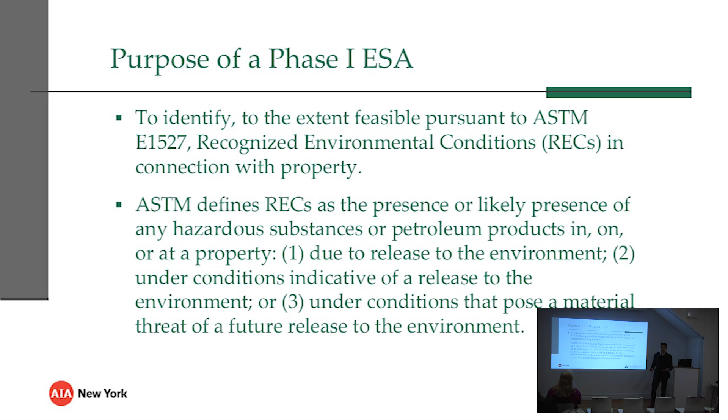Basically the purpose of a phase 1 is to find a recognized environmental condition, which the definition is the second bullet, but it's basically: was there a discharge of hazardous substance in the environment, or could there be a potential discharge to the environment? It's a desktop evaluation and a site reconnaissance. There's no borings, no drilling, no sampling when we do an ESA.

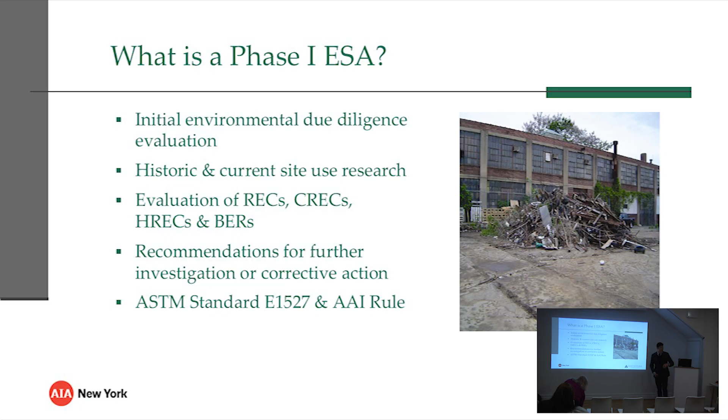We evaluate the site history and current site conditions to identify recognized environmental conditions, controlled recognized environmental conditions, historical recognized environmental conditions, and business environmental risks. And then we provide recommendations for a phase 2 or any other corrective action or remediation if necessary.

Would that include plumes nearby? Yes, that's a vapor encroachment screening. If there's a site that's adjacent or nearby to the property and there's potential for groundwater contamination to migrate onto the property, which could result in vapor intrusion into the building, it would include that. A tier 1 vapor encroachment screen is typically included in a phase 1 ESA.

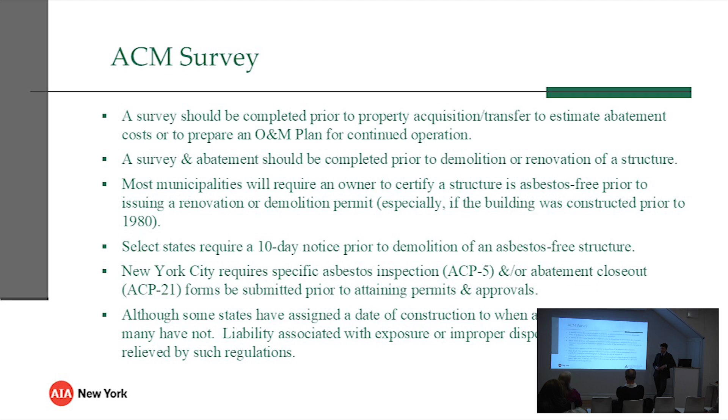Okay, so abatement, removing the asbestos from the building. The EPA and usually the state requires a 10-day notice before you start abatement. Depending on the size of the area that contains the asbestos materials, you need to provide some kind of containment, whether it's a small room like this, we can tarp off the doors and call that good, or if we're abating a whole building, the whole building is tented.

An alternative to abatement is encapsulation, which is encapsulating like a floor that has 9x9 floor tiles. Usually that ends up being more expensive in the long run because it almost costs more money to do the encapsulation the right way. And then if you're gonna redevelop down the road, you're probably gonna wanna remove that ACM anyway.

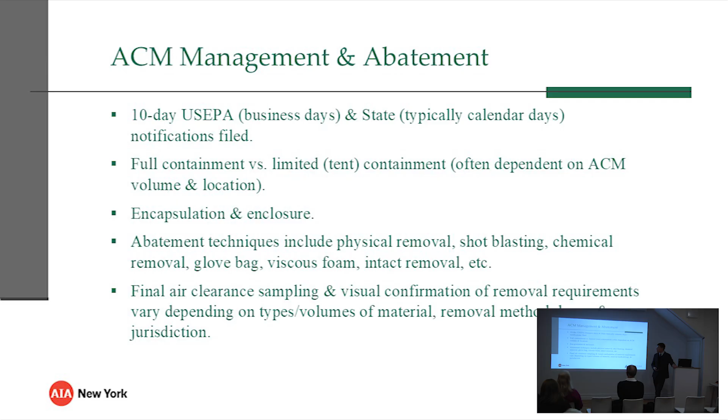Yeah, go ahead. What about roofing, tenting a building or not? Yeah, that's a good question. I'm not sure. There's different kinds of abatement techniques to minimize any particulates. And anytime there's a controlled demolition or abatement, there's air monitoring requirements to ensure that there's no fugitive emissions off the piece of property. So there's ways of getting around that for roofing or hard to enclose areas. Okay, and then a requirement post abatement is to get air clearance samples, which just means that the facility is free of any asbestos fibers in the air.

Phase 2. Okay, so this is what I do. This is where we take the findings of phase 1 and we actually go and collect samples. You've got a recognized environmental condition. There's potential contamination, and we go and sample soil or groundwater or soil vapor to see if those RECs are actually contaminated. It's not intended to be a comprehensive delineation or investigation. It's just, do you have a problem? Yes or no. Trying to judge the magnitude from a phase 2 is sometimes difficult, and usually they can be iterative. You do a phase 1 and then a phase 2. We identify contamination. We say, hey, we should look into this one REC a little bit more.

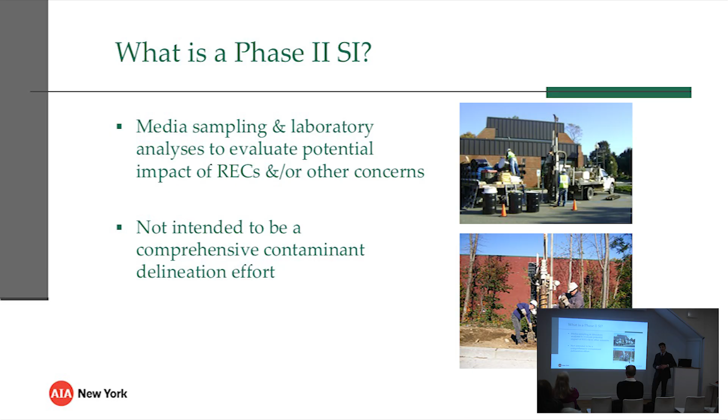There's high levels of contamination, or maybe it's a limited area or something like that, to sort of quantify what the client would be into for remediation. Are there different ways of remediation? One would be like removal, another one would be to let it air out, make a pile, and let it...

Yeah. Well, there are 1,000, depending on what kind of contamination you have. There are 1,000 different technologies, from removing contaminated soil and disposing of it off-site to chemical injections into groundwater to remediate contaminated groundwater. Soil vapor extraction. I think I have a slide on remediation. And a lot of times it's a cap and a deed notice or something. Right. Along those lines. That's a good point.

Yeah, if you have a site where it's going to be a commercial site and you don't meet the commercial soil cleanup objectives in New York, you can put an impermeable cap on and implement a deed restriction on the property. Right, which could be your building, the paving. Right. Whatever. Landscaping. If there's 2 feet of clean fill.

All right, so yeah, I covered a lot of this. If we identify any RECs that may need investigation, we recommend conducting a phase 2, and obviously the scope of the phase 2 is dependent on the findings of the phase 1.

I find that the phase 2 is the most important because it can actually give us an idea how to quantify what kind of cost a developer or a client is potentially going to incur to deal with their environmental issues when they go to redevelop, or if it's too risky, they may back out of the deal. So I'll go through a couple different remediation technologies here.

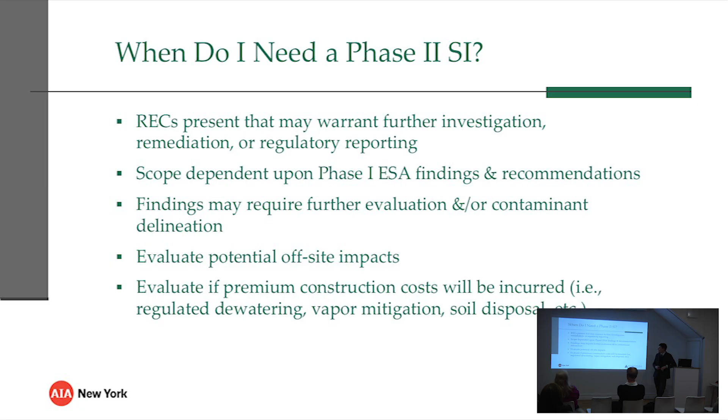Say what? Sorry? Send it to Jersey. Send it to Jersey. We've been sending it to PA quite a bit lately, actually.

Groundwater remediation. There's many different technologies to remediate contaminated groundwater that are beyond the scope of this conversation. And as we talked about before, just capping the site and implementing a deed notice. And then for groundwater, another thing is natural attenuation. Sometimes contamination just kind of goes away on its own.

And then what I do, I specialize actually in vapor mitigation, which I'm sure you guys have seen quite a bit. It's like a radon system beneath the building. It's perforated pipe beneath the slab of the first floor, and PVC ventilation pipes going to the roof.

So yeah, that's kind of why I end up talking to architects most, because I'm an engineer, so if it works, I don't care how it looks, but you guys care how it looks, and if there's 12 4-inch diameter pipes going up the side of the building, you kind of want to have a conversation with me. So how do you take the pipe? Well, how do we bring it to the roof?

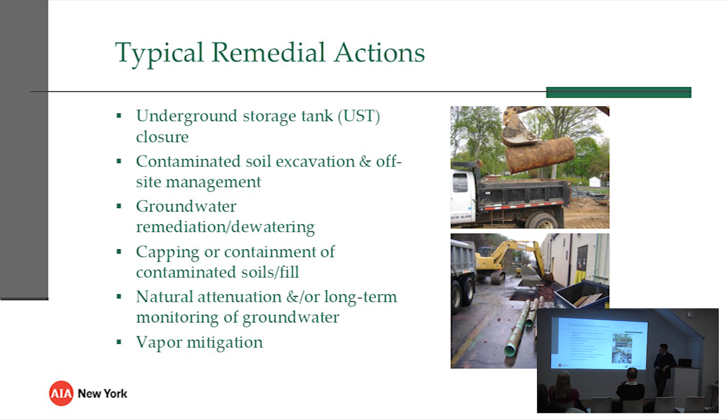I got more slides here. So a PCA is basically documenting. So the phase 1 ESA is the ground, and ACM is asbestos. The PCA is just what does the property look like, the physical condition.

So we look at documentation on critical components of a building, like the HVAC system, the windows, the roof, and understand how old those components are. We do an inspection of the property to look at the condition of all those components, and then we'll prepare a cost estimate and an approximate lifespan of those components, and then compile that into a report.

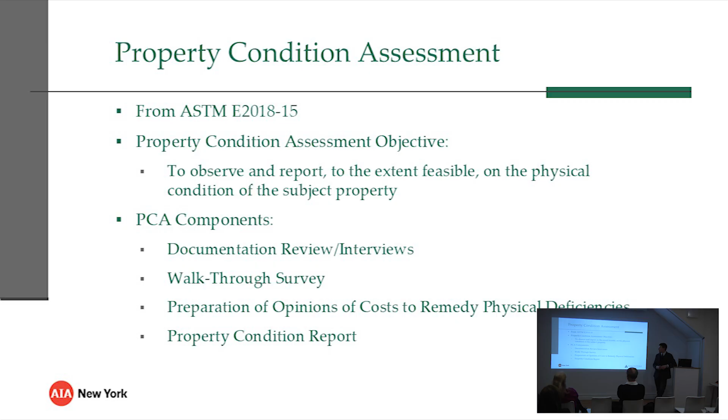So you want condominium associations that require that now? So yeah, I am going to get to that. Thanks. When a homeowners or a condo association needs to generate their reserve estimate, they need to know how much am I going to need, are we going to need a new HVAC system in 10 years, and how much is that going to cost, and they use that to develop their reserve.

In some states, I don't know if New York does. They will, not yet. You don't think so? Yeah, okay. But Florida actually requires ongoing PCAs since that building collapsed a few years ago, and they actually review the homeowners association reserves and the PCAs. Right, and we identify any deficiencies requiring repair, and come up with a replacement schedule for any componentry.

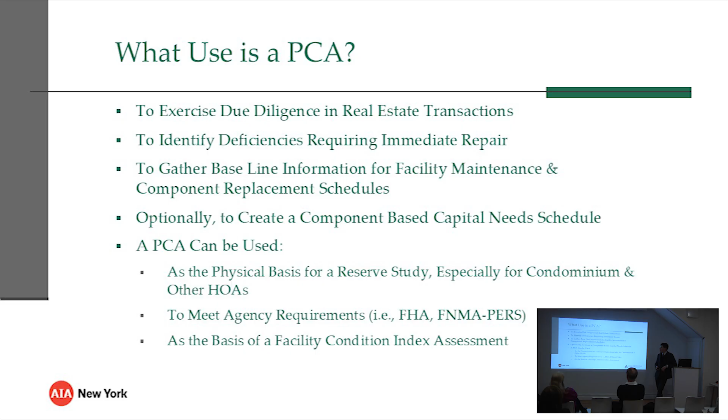All right. We made it. Now we're on the geotech. Yeah, that was good. That was quick.

All right. So one thing I'll add to that before we get into more of the geotechnical, I'll bring my water with me, is that the purpose of that phase 1 ESA, the reason the banks want it, is something called all appropriate inquiry. So if you don't do a phase 1 ESA and there's contamination on the property that you buy, it's now your contamination and your problem. If you do the phase 1 ESA, then you could go back to the responsible parties. So that's an important aspect of that.

Oh, that's interesting too. We're changing up here and not changing here. Yeah, you alluded to that.

Okay, so what Steve said in the beginning of this is a little bit of our environmental geotechnical due diligence presentation, and now we'll get into the ground a little bit more. I guess we're moving top down instead of bottom up, and these are some of the approaches that we typically use when we have a client that's looking to purchase a property, and some things they need to think about so that they don't get in over their head after they already have the property.

Because, look, you can specify stone on the wall that you acquire from halfway around the world. You can get whatever kind of windows you want, but the site is the site, and a lot of times in real estate it's location, location, location, and all the good sites are gone. So most of the developments now, before they get started, before you get a building, before you start picking out what you pick out, we usually have to go through these hurdles. So it's an important part of the overall process, right?

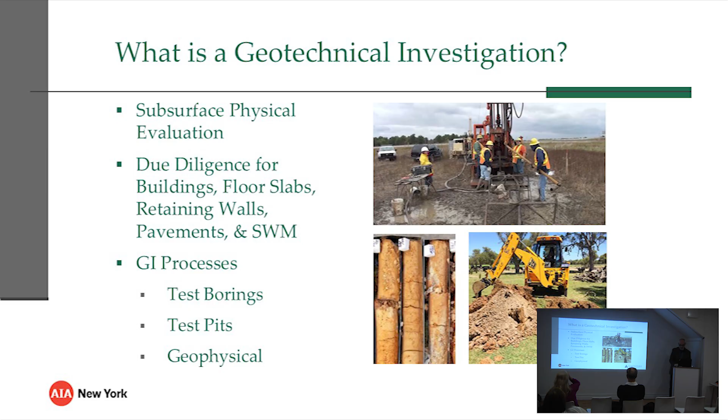Most of the time you're doing something with either test borings with a drill rig, test pits with a big excavator, or sometimes geophysical, where you get into carbonate rock areas, or areas with former mines. If anybody's heard what's going on with Route 80 East in Wharton, New Jersey right now, Route 80 East is closed down. They had a sinkhole open up, and then another one open up 75 feet away, and it's from an old mine. There were a lot of iron mines in that part of Jersey. So that was a major highway that was shut down because of it.

So when do you need to do a geotech investigation? If you're going to develop a site, I'm a little biased, but I think you need to do them. If you work with retail clients or commercial clients, they actually have a program in place where they have specifications they want to see met. Or there's a lot of local land development ordinances across the country. Certainly in New York City, it's very well defined. It's probably more defined here than in most other places.

So if the building code is going to call out what you need, regional geologic considerations. If you're out in College Point, I don't know if it's regional, but a lot of sites we've done along 20th Avenue out there, it's all 27 feet of garbage fill over another 10 feet of organics over weight-of-hammer material, very soft material for 80 to 100 feet. Has anybody ever walked around and seen some of these parking lots out there where you've got manholes sticking out of the ground?

There's what used to be a Waldbaum's. I don't know what it is now. But the building was on piles, so the building was going nowhere. But the parking lot wasn't, because you never pile support a parking lot. It's way too expensive. It would be crazy. But since the building didn't move, the parking lot sank. They were just throwing asphalt between the sidewalk, which was also pile supported, and the rest of the parking lot.

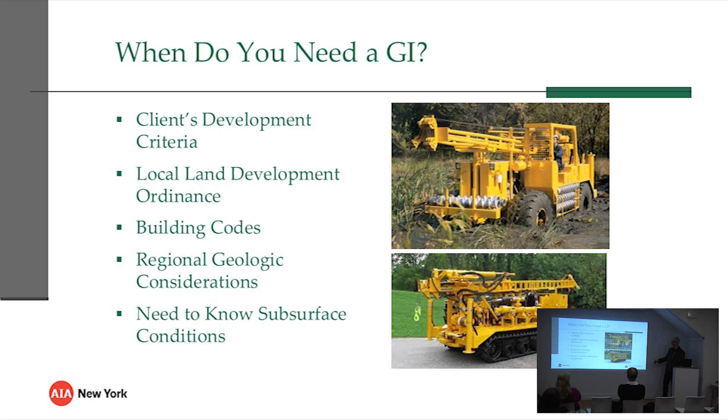And the last bullet is whenever you really need to know what's going on, which is when I say you should almost always do it. But why are we doing it? Why are clients doing it? Really what we're trying to do is manage that risk. Because every site has specific conditions to it, and not just the site itself, but it also depends on what your construction is and what you are building. Are you going 2-3 stories below grade? So now we're worried a little bit more about rock. We're worried a little bit more about groundwater.

Was this previously a 3-story residential? Now you want to build a high-rise. Obviously, it's a different condition. The borings need to be deeper. You need to understand deeper subsurface conditions. So every raw land site and every previously developed site, they all have site-specific conditions and project requirements that lead you down this path. A lot of times from a development standpoint, you're looking at it just as, what are my costs going to be to develop this property? That's really what you're trying to answer.

But when you think of it from a design standpoint, some of the things I touched on, there's cut and fill, there's bearing capacity or site layout. Sometimes it helps you from a site layout standpoint where I know I have issues on this side of the site, so I'm going to try and throw my basement on the other side. Or I'm going to try and throw my big cuts and change my grading based on where my issues are. Dewatering is the big one, right? Also, one has a habit of assuming that all the ground is the same throughout the whole site. So you take 3 borings and suddenly you think you have it all figured out, but you don't know anything.

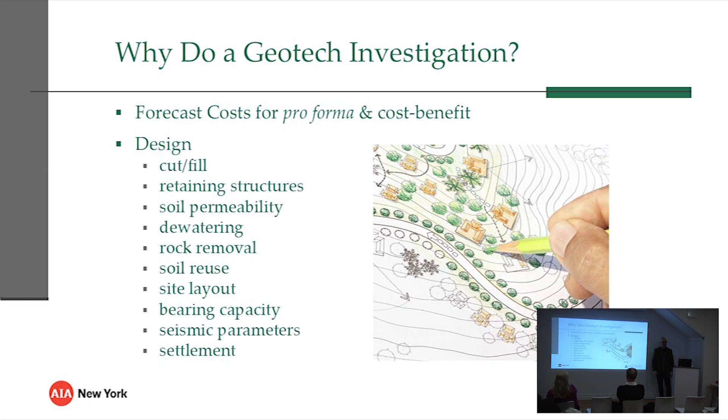I see a green lot in Brooklyn just full of grass with development all around, and I know we're going to pull the craziest stuff out of the ground once we start getting in there. That's one that was there for a reason; it hasn't been developed yet.

So what scope is needed? This is more of a strategy approach to what you need. A lot of times you have to look at what you're trying to achieve as the end result. From a due diligence standpoint, it's always good to do things in stages. For instance, you have a client that wants to buy a property. They want to be the first ones there.

They want to understand what their issues are, but they don't know if they're going to get the zoning that they want. So you may not go all in and do all the borings you would normally do. You may do a couple here and there and answer the big questions. Yes, you're going to need deep foundations, or no, you're not. You might just need some type of ground improvement. Then you get your zoning, you develop your concept, and you feel good about what the building is going to look like.

Now maybe you go back and address all the code requirements, and you get a boring for each 2,000 square feet, or whatever you need. That's generally a good way to do it. There is some iterative process to that; you end up generating two reports. So if you're not 100% sure the site is going to happen, that's a good way to do it. If you are, and it's all about time, then you go straight ahead, plow forward and get as much as you can.

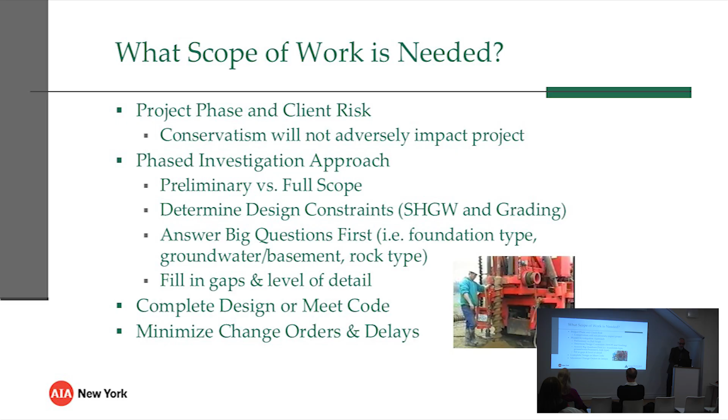So if you are working with a geotech engineer, these are some things that are helpful to bring them in the loop on. It seems crazy, but I have to say site location, because sometimes I'll get a square on a plan, maybe even a tax map with no location, just the municipality, and they say, I need a geotech report. For us, that's tough. I really need to know the site development plan, your grading, and your loading. Quite frankly, whether it's an 18-story or a 100-story building, I don't care. I just want to know what it loads on the foundation.

Sometimes we'll get on a team. We did a lot with Richmond University Medical Center, and I remember getting on that team and they asked, "How much hospital work do you have?" And I said, "Here's a list of projects we do, but it doesn't matter to us what happens above. That's your world: what the walls look like, what furniture is picked out, what the sight lines are, much beyond what I know about."

It's the loads. So the loads are really important, the cuts, what the floor elevations are, how deep you're going. Those are important things to know. An existing condition survey is great to have because we need to understand how we're going to access the location. So whenever we have those, it's great.

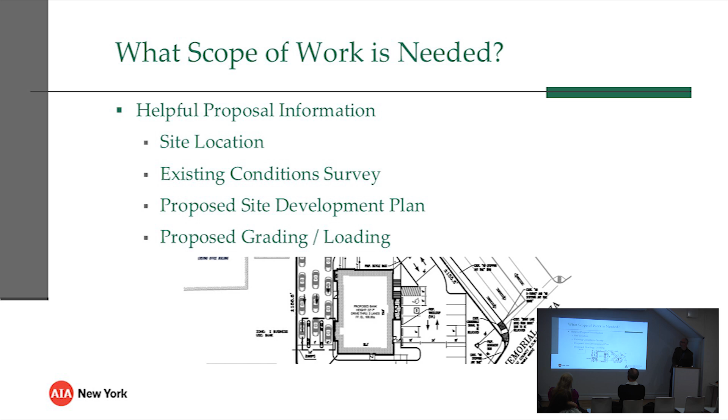So here's the typical scope of work: utility clearance. That's a big part of it. There's a public process, but the public process stops at public right of way. So if you're ever off of the public right of way, then there is nobody who marks it up.

And so if there aren't existing plans, it's always good to have private locators come out, and they'll pick up anything they can with a magnet, or if they can see a manhole, they can connect to that and try and trace a line across it. But if you have an old sewer, an old clay pipe or something like that, there's not much anybody can do about that. So it's a little bit of risk we take when we do this.

So generally, you do the utility clearance, you go out there with some kind of investigation technique. It's important to have a field engineer out there and not just send a driller out, because it's a dynamic process. You don't always know exactly what you're going to find. You want to make sure that you have the rig out there. You want to modify the program.

We have a plan going in. Hey, we're going to drill these borings 30 feet deep, and we're going to sample X, Y, and Z. But then we get something strange, and we want to delineate it better. So you want to have an engineer out there with a drill rig doing the monitoring and sample collection. And then we'll take samples back to the lab.

We'll run index tests to see gradation. Is it a granular material? Is it fine grained? Is it going to swell when it takes on water? What's the strength of it overall? And that's usually wrapped up in a nice little report that a few of us have looked at here. So that's good.

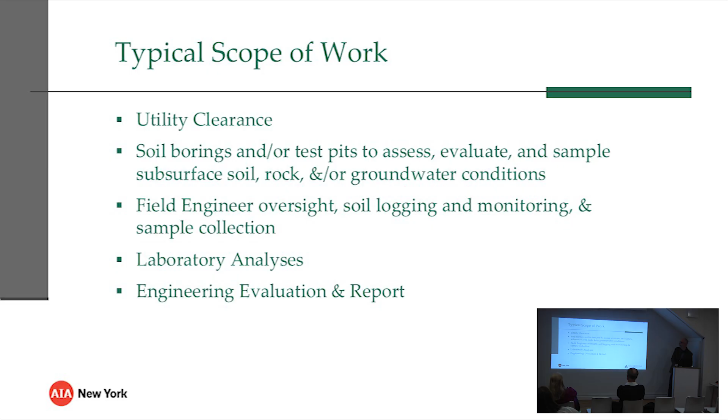Things to consider. A lot of times we're called in the middle of due diligence. I get a call, hey, I've got 60 days due diligence. How soon can you get out there and get this done? And generally, well, it depends on what you're doing, but 4 to 6 weeks, unless you're spending a lot of time in the field, is probably what you normally see for this.

But that's assuming we can get a rig on site, because I go on site and the owner says, well, I need a certificate of insurance. We need this access agreement. And the owner hasn't even signed an LOI with us on this property yet. So that tends to drag on. So access, I always like to say, if you're dealing with an owner that is trying to get this work done.

From a site disturbance standpoint, it's a drill rig, and we're going to drill a hole in the ground. So if it's new pavement, we'll patch it, but there will be a hole there. If you're drilling and there's clays that come up sometimes, and water and so forth, that can stain concrete a little bit. And it's generally not in most geotech investigations to restore things, to landscape, to clean things up. That's usually an added step. It can be done. It's just you typically don't see that happen.

If you're on a contaminated site, what do you do with the drill spoils? It's just like anything else with earthwork. If you dig a hole in the ground, the material that you get out will swell, and you will not get that all back in. And there's always a little bit of extra. So if it's just a typical, non-contaminated site, it's okay. Maybe you can spread it in some areas that don't have pavement or other landscape areas. If not, you have to manage it off-site.

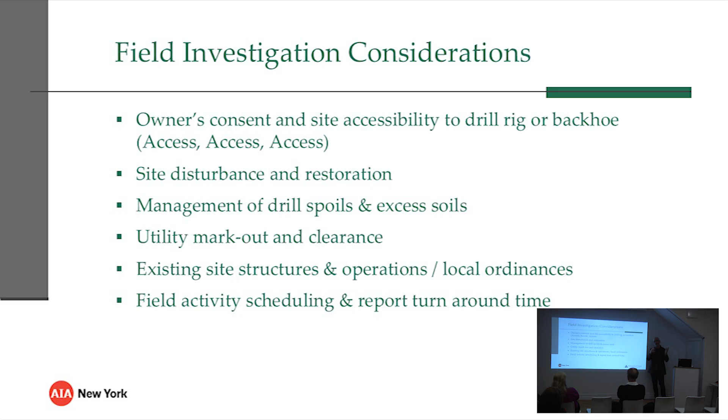And then after the field work is complete, it's about 1 week to 2 weeks to complete lab testing, then another week to 2 weeks for the report. So a lot of times, sometimes I stretch that out, it's 4 to 6 weeks if you're drilling in the field for less than a week, from the time someone says go to the time it's done.

All right. Now here are all the pictures, since Matt felt like he didn't have enough. Just to show you a typical truck-mounted drill rig, that's on your left. You just drive right up, and that tower, as it's driving, lays across the rig, kind of like you see on this ATV, the yellow one on the right. And then it just flips the tower right up, and you start drilling. That's the nice thing about a truck rig, the truck can drive itself.

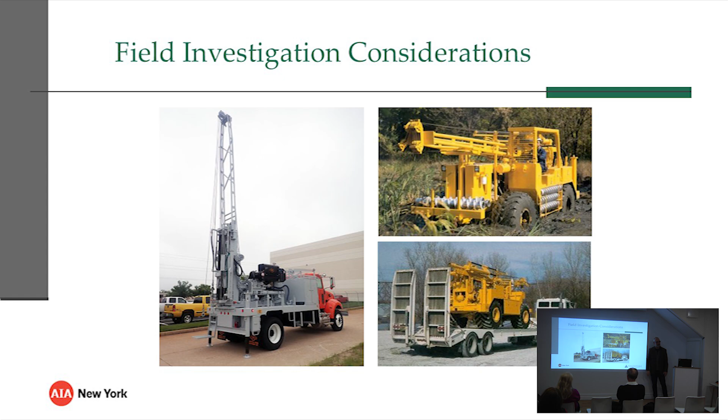You have these off-road rigs or ATVs, and this wasn't ours, but this looks like it's driving right through the wetlands. I have to see where we pulled that from. But you have to bring it in on a lowboy or some other kind of truck, so it's a little bit more expensive, but it can go anywhere, go off pavement and all kinds of places.

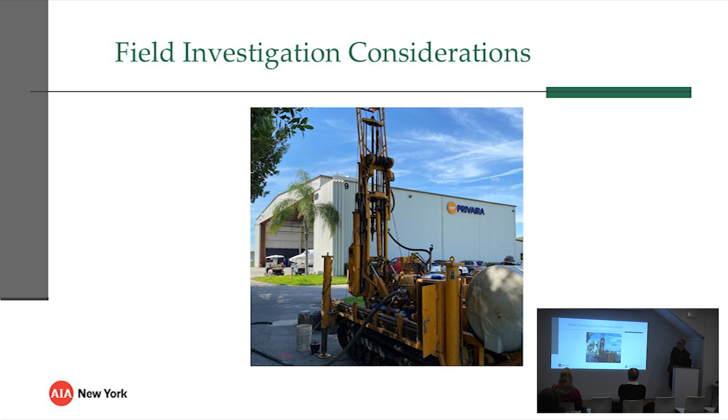You can do borings without a roof on it. There are rigs that you can use in a room like this, but the production takes a lot longer. It's a lot more expensive. What is this one? Oh, this is just a track mounted rig. There's nothing too exciting in that one. I don't remember why that one's there. Oh yeah, here's one of those ones that are inside.

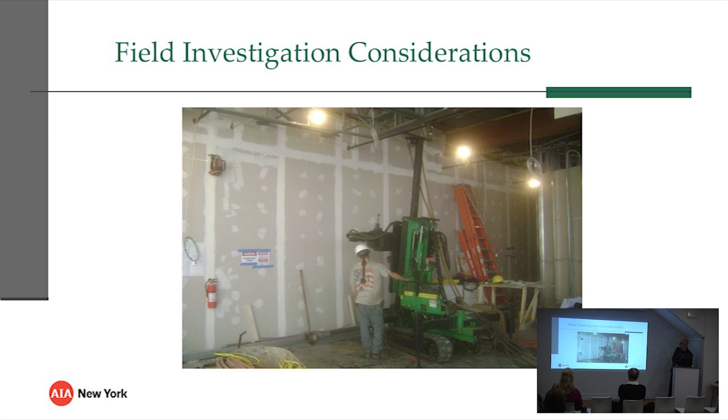This one's neat too. It's probably tough to see for everybody, but this has the hydraulic hoses so we can set everything out on the sidewalk, and you can drill on the inside. And this has a little bit of a lower headroom. That one's got decent headroom, but a normal rig needs about 26 feet or so to raise that tower up. This one looks like it's about, I'd give it 14 feet, somewhere in that neighborhood.

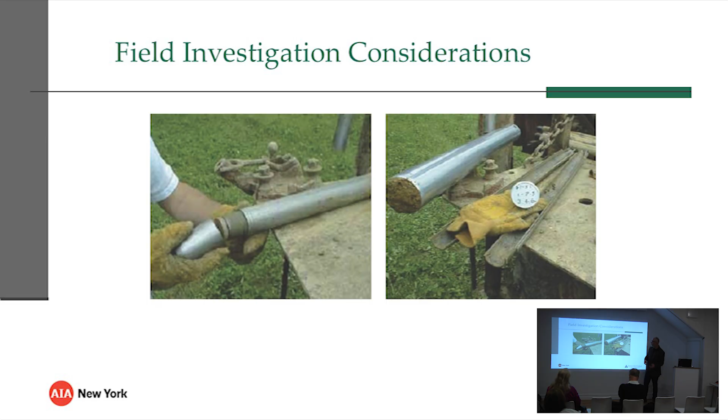And then when we drill, we're also collecting samples. And what you'll normally see is you'll see it through a split spoon. And this is the split spoon over here, so you take the shoe off the end and then it falls right over. And this is a little bit of a grainy picture. I wonder if I can, yeah.

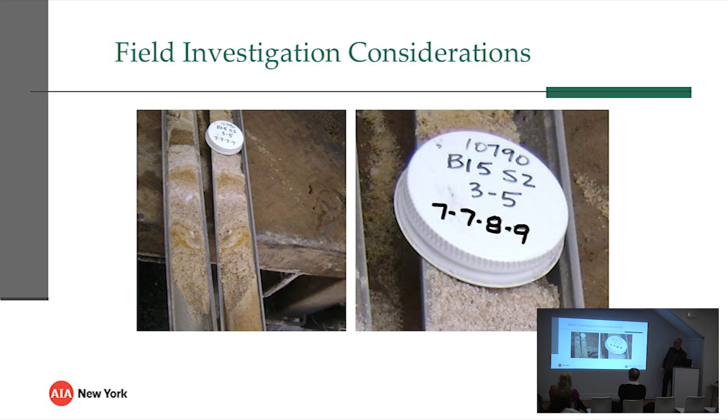On the right, when it falls over, you can see the sample. This was a nice sandy sample. We'll collect the sample out of there and we'll put it in some jars. On the lid of the jars is just some information that identifies where it is and the depth. These are blow counts right here with that 140-pound hammer: how many blows it took to drive it 6 inches, and that's 4 successive 6-inch increments. You're becoming geotechnical engineers here just a little bit.

Another important thing as part of the investigation process is seasonal high groundwater. You have to think about it from the groundwater level readings that you get. What I'll see a lot of times is someone will go out, drill a boring, put a tape down the hole, see where it gets wet, and say, okay, that's where my groundwater is. And that's not realistic. It's like taking a picture right now and saying this is the weather all the time.

And you can do a couple of things. You can put a well in the ground. You can monitor it over months. We have automatic water level loggers that'll take a reading every minute, every 20 minutes. But to me, was that a dry year? Was it a wet year? If it was a wet year, probably all right.

But there are other things called seasonal high groundwater indicators, where you see things like mottling and depletions in the soil, the way the soil changes based on where the high water mark in the ground is. And for basements, or where you want to know groundwater elevation, to me that's the only real way of doing it with confidence.

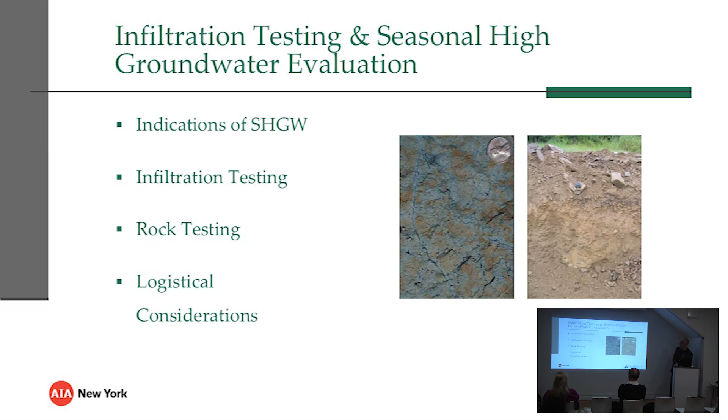Some other things from a geotech due diligence investigation to help you avoid some of these pitfalls are supplemental investigations. A lot of times the geotech reports are done in the very beginning of the project, due diligence, that we've been talking about here today. In the meantime, the design changes 3 or 4 times, the concept is different, and the owner just takes that old report and puts it out there, and everyone goes to bid on it, and there can be real issues with that.

You didn't have a basement when we did the investigation, and now there's a basement. Or you moved to a part of the site where rock was shallow, or there's a lot of existing fill that's contaminated. So keeping geotech engineers involved in the bidding process, in the specifications, looking at the earthwork specification, is important. Also trying to identify what I call geotechnical premium costs.

Everybody knows to a larger extent what it takes to build conventional shallow foundations. But what if you need to do ground improvement? That's something out of the ordinary, out of the box. That's something we help define. Same with pre-bid and staying in touch with the team.

And then CPT&I is construction phase testing and inspections, and that really goes back to that model that we talked about. If you look at some of the guidance documents from the Association of Soil and Foundation Engineers, they'll tell you that geotechnical engineers' recommendations aren't complete until they see it during construction.